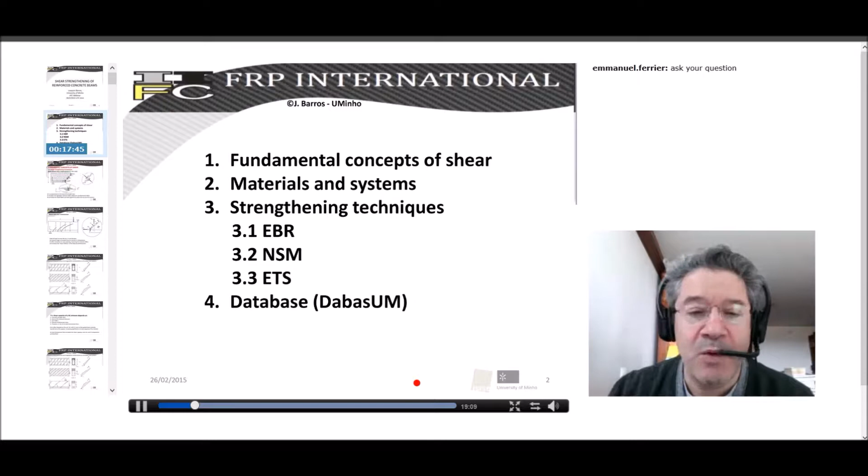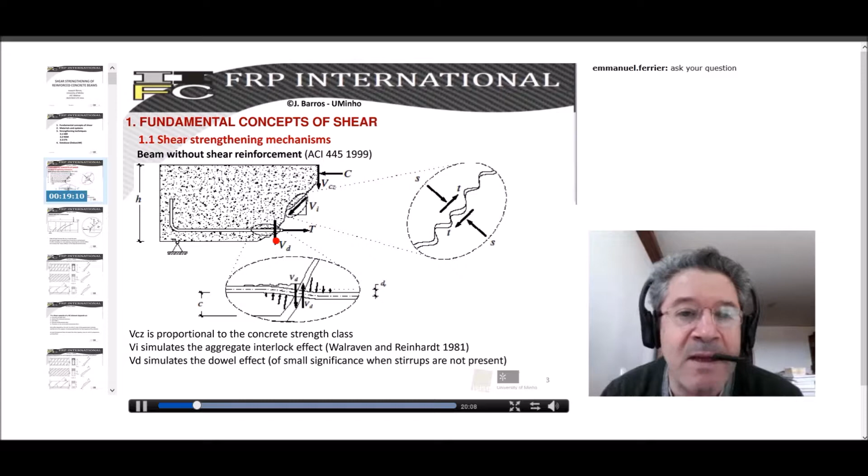Going directly to the first topic, dedicated to the fundamental concept of shear: when we have a reinforced concrete beam that fails in shear, three types of mechanisms are mobilized. This one, which I designate VCZ, is proportional to the concrete strength class - this part corresponds to the uncracked zone of the concrete. The other one is VI, that simulates the aggregate interlock effect. And finally, the third one corresponds to the simulation of the Dowel effect, or the contribution of the longitudinal bars for the shear strengthening.

When we have the stirrups represented here, in fact the stirrups have beneficial effects in all the previous terms, because, for instance, in the case of the favorable effect for VCZ, when we have these stirrups, we have a larger uncracked concrete zone, and consequently a higher contribution of uncracked concrete for the shear strength.

The stirrups also have a beneficial effect for the aggregate interlock contribution. Why? Because the stirrups crossing the diagonal cracks limit the crack width and crack sliding, so the aggregate interlock is more effectively activated. Finally, since the stirrups embrace the longitudinal reinforcement, they increase the shear stiffness of this flexural reinforcement, promoting or increasing the dowel effect. So the stirrups have these benefits in all three terms I explained before.

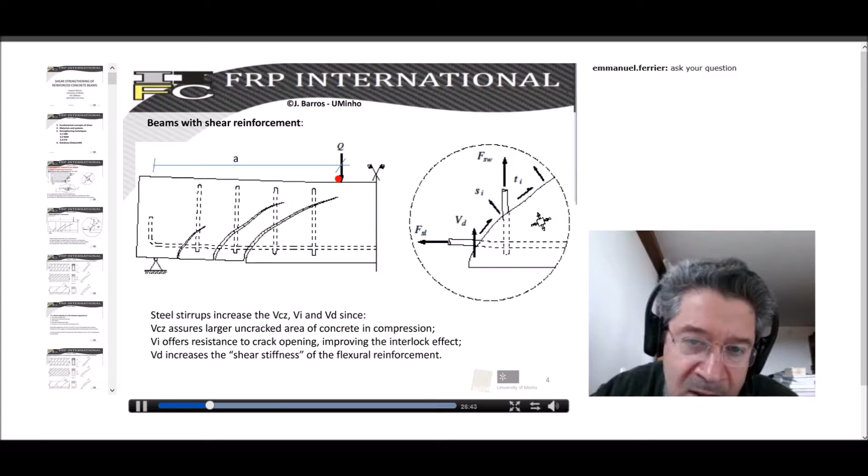When the ratio A divided by D is lower than 2.5, part of the load can be conducted directly to the support, giving a much higher load carrying capacity due to this arch effect. The shear capacity also depends on the flexural reinforcement ratio, due to the dowel effect, and it also changes the profile of the crack opening evolution of the shear crack. It also depends on the axial compressive force, because an axial compressive force contributes to a larger area of uncracked concrete and a smaller crack width, which enhances the aggregate interlock effect.

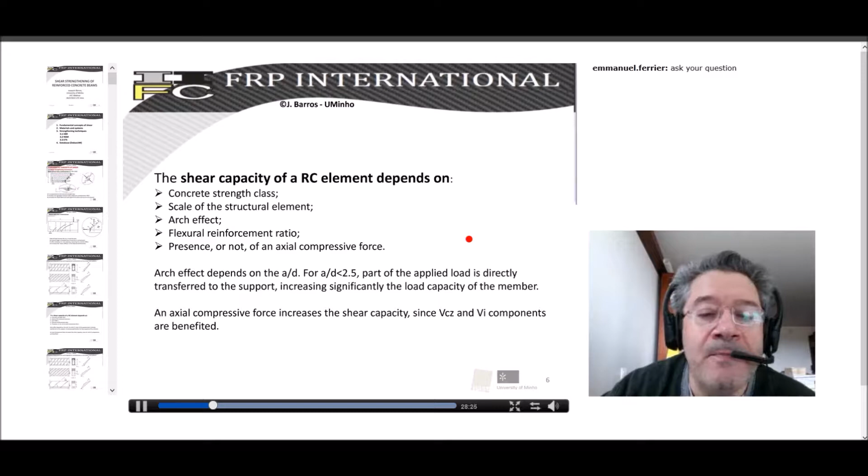So now, the idea is to present the fundamental concepts that are supporting the analytical formulations we will use to estimate the contribution of the FRP. But we need to start by understanding the fundamentals of the analytical formulation.

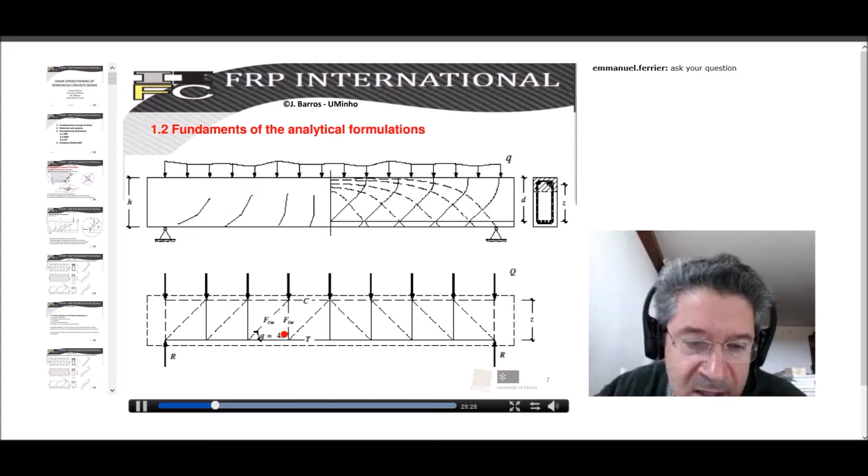So when we have the beam supported by a certain distributed load, in fact what we have are the isostatic compressive forces. We have the compressive struts, and we have the tensile ties, and these tensile ties need to be supported by the stirrups. This is what we are doing: we are introducing the stirrups in order to support these tensile forces.

If we have a representation of the forces formed when a beam is subjected to shear forces, we have a compressive force in the top part of the beam, the tension supported by the longitudinal bars, a diagonal compressive strut, and a diagonal tensile tie.

From equilibrium, the shear force designated by V is the vertical projection. The shear force is supported by the tensile force in the stirrup projected to the vertical direction. This is the force installed in the stirrup, and this is the inclination of the stirrup, and when projected to the vertical, it should be in equilibrium with the vertical force.

The force supported by the stirrup, if for instance the stirrup has two legs as is normal, we need to take into account that here we have 2 times the cross-section area of the vertical elements. The force supported is the number of stirrups that we have along this length.

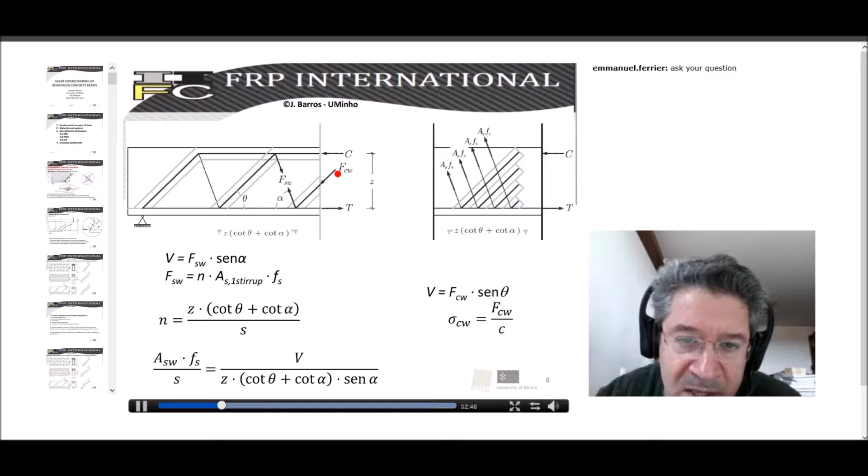And finally, we need to verify that we do not have crushing in the concrete compressive strut. Otherwise, we can have a very brittle failure mode.

Now, if we want to increase the shear capacity of a reinforced concrete beam by installing FRP systems, we can have a contribution designated by VF. So the total resisting force is the contribution of the concrete plus the contribution of the existing steel stirrups, now adding a term that is the contribution of the FRP.

The contribution of this FRP - in this case, I'm representing it as having a U configuration, and I'm assuming that the thickness of the FRP is designated by TF. We can have this FRP distributed continuously along the lateral faces and bottom faces in the case of using a U configuration.

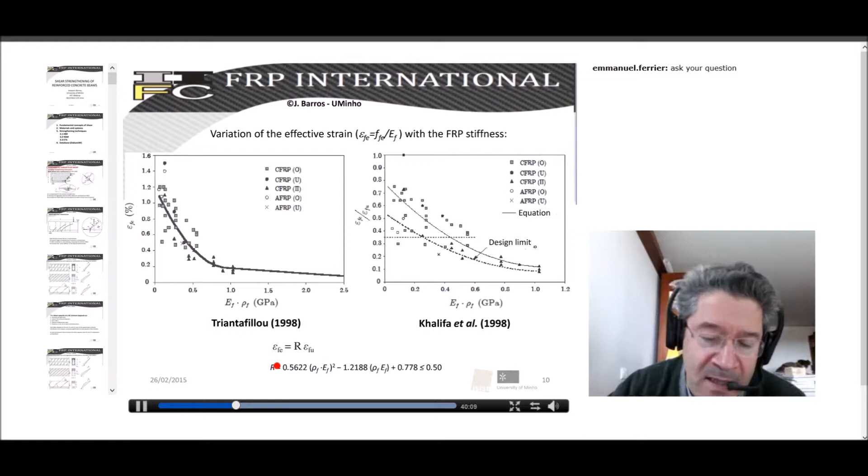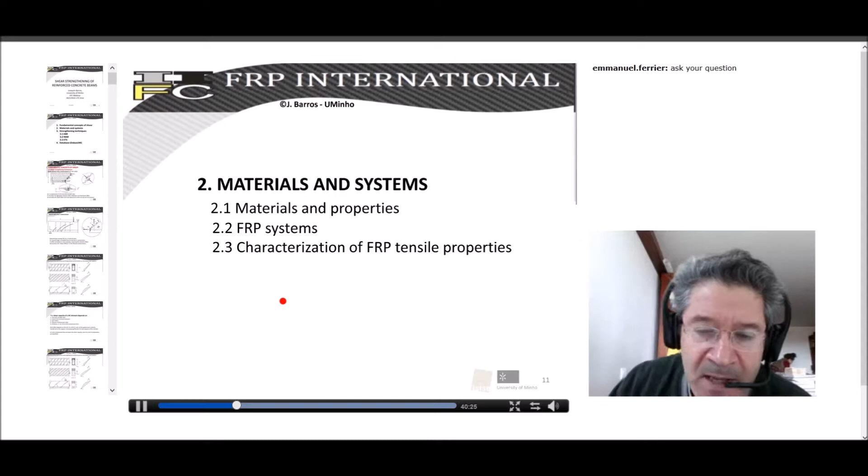Now I have a short presentation about materials and systems used for shear strengthening, but I will not spend too much time on this topic because, as I mentioned, in previous webinars my colleagues already talked about this. This is the relationship between stress and strain for several types of materials.

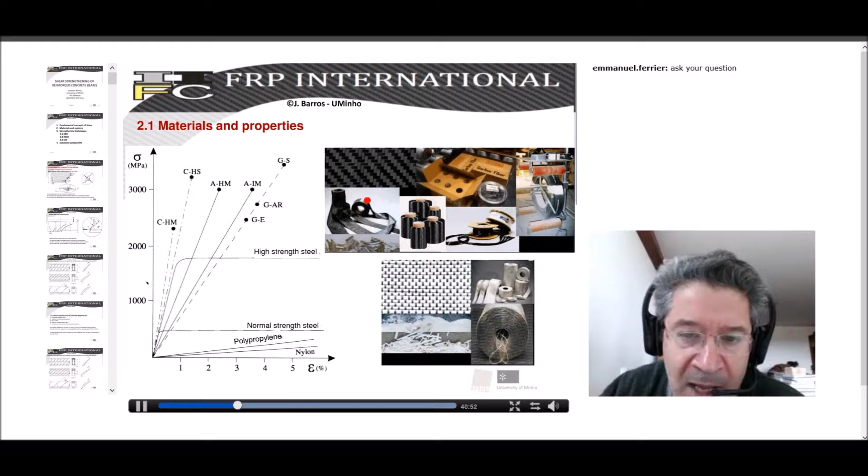In case of shear strengthening, we are mainly using carbon fibers, using wet layup systems or laminates.

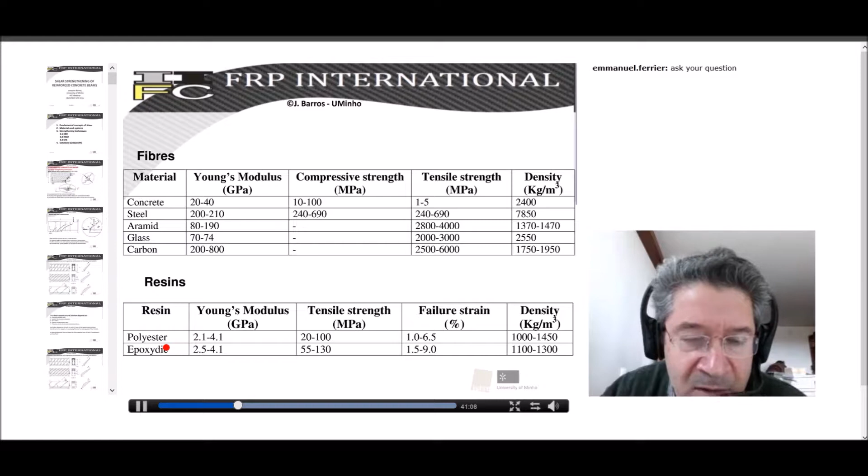We generally use epoxy resins to bond the CFRP systems to the concrete substrate, and the properties are indicated in these tables.

I will not spend time on this since you know it quite well. In terms of FRP systems, we have prefabricated bars and laminates, using an adhesive system to glue or fix the FRP bars or laminates to the concrete substrate.

Or we can use a wet layup system formed by a sheet or tissue, also fixed or bonded to the concrete substrate by an epoxy system.

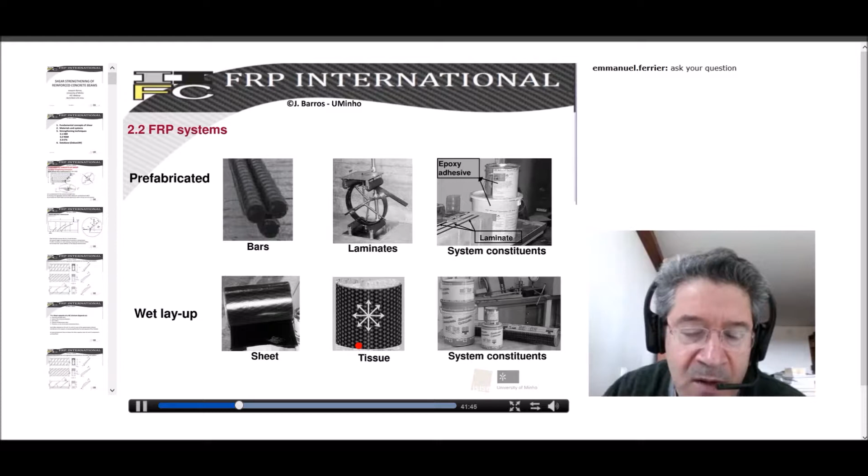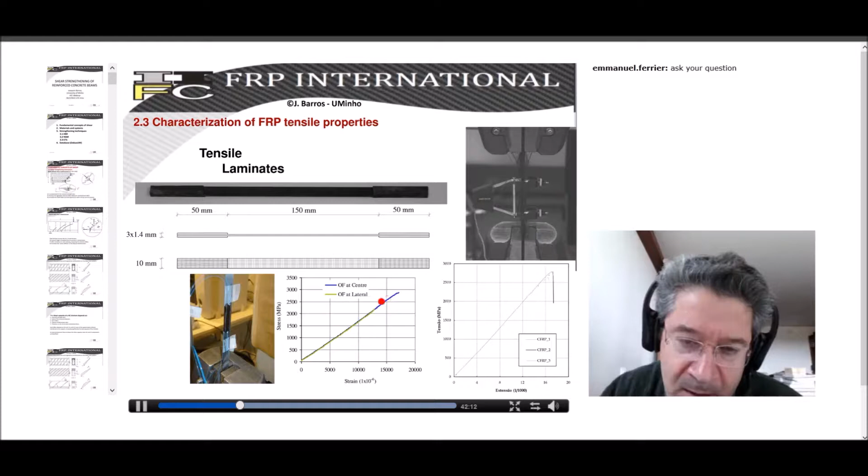To characterize these materials, we executed some coupons of laminates or wet layup systems and performed tensile tests to obtain the stress-strain relationship, which presents a linear elastic diagram and then fails abruptly.

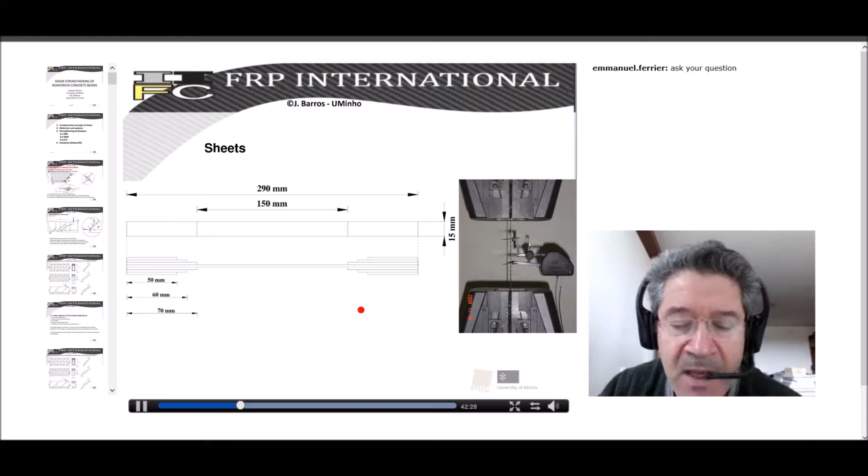This is the type of coupon we produce to characterize the tensile behavior of the wet layup systems.

It is also important to characterize the properties of the adhesives, mainly when we want to model the nonlinear behavior of reinforced concrete beams strengthened with CFRP systems.

In terms of strengthening techniques, as I will analyze in this lesson, I'm focusing mainly on three techniques: the EBR, the NSM, and the ETS.

In the EBR technique, I will present the shear strengthening configurations most used in this technique, as well as the shear strengthening effectiveness based on experimental evidence.

And finally, I will present the design formulations according to FIB, the European approach, the American approach ACI, the Italian design guideline, and the Australian design guideline.

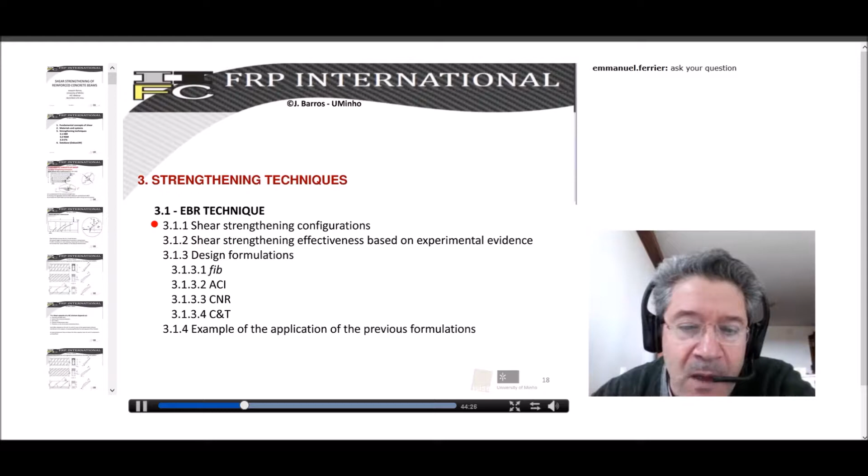This is some photos and schematic representations of the EBR shear strengthening solutions. This is a U configuration, and in this case we are also using an anchorage system.

In this case, we are using strips of wet layup systems to increase the shear strengthening of this beam. This is a special L laminate

that recently are being used also to increase the shear capacity of the beams. This is a special configuration of the EBR systems where it is executed some holes in the slab that is supported on the beam, and so in these holes it is made the anchorage of these shear strengthening systems.

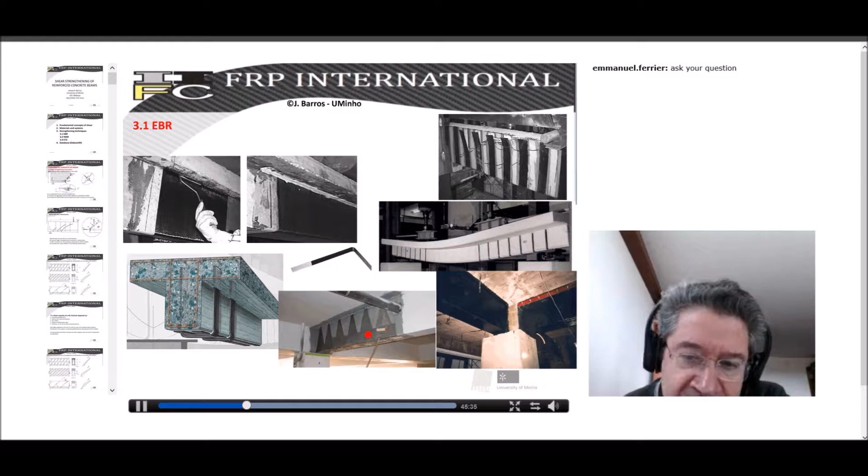The most common EBR strengthening configurations are those represented here. So this is a full wrapping, but I use the symbol O to indicate that it is a full wrapping shear strengthening configuration. We have also a U configuration where the FRP systems are bonded on lateral surfaces, but also in the bottom surface of the cross section.

We have also the S, that is sided. The FRP are installed only in the lateral surfaces of the cross section, and sometimes we use anchorage devices to try to avoid the premature detachment of the extremities of this U and side configuration. So I use a plus sign to designate that we are using in this case some anchorage devices.

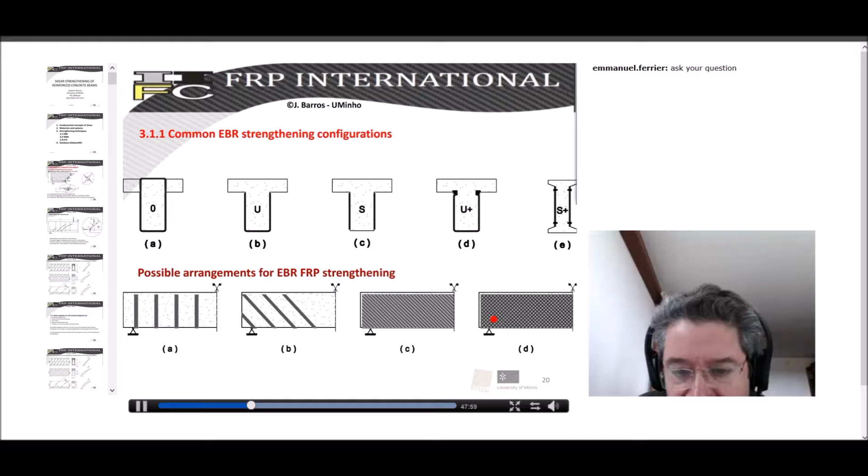I'm presenting here now some experimental results in order to show important aspects in terms of the effectiveness of different shear strengthening configurations. For instance, in this case, this was a study carried out by Professor Khalifa, where we have the reference beam, C-BT1, the C-BT2.

We have one layer of U configuration, and where the fibers are vertical. The fibers are in the vertical direction. The C-BT3, it was installed with 2 layers. So we have a vertical layer, with the fibers oriented in the vertical, 90 degrees, so in the vertical.

But we have also another layer in the horizontal, so it's 0 degrees, okay? 2 layers in this case.

In the C-BT4 and in C-BT5, in case of C-BT4, we are using strips of wet layup system, where each strip has a width of 50 millimeters, and the distance between the strips is 125 millimeters. While in this case, the same strips, with same width and same spacing, are installed, but installed only on the lateral faces.

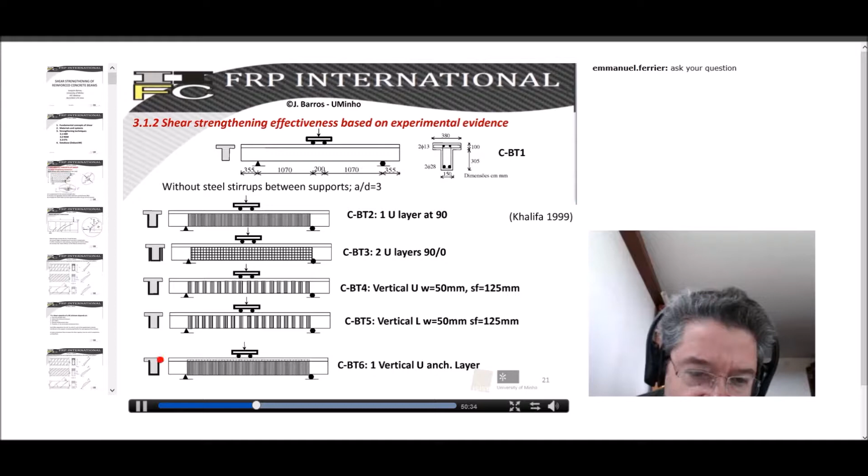In this case, in C-BT4, we are using U configuration, while in C-BT5, we are using L configuration. And finally, in C-BT6, we are using a vertical layer, a U configuration with the fibers in the vertical direction, but we are installing in the top part of the U configuration an anchorage mechanism, anchorage device.

We have here the relationship between the applied load and the mid-span deflection. The first aspect, and it's quite clear, is that when we compare the force-deflection relationship obtained in the reference, we don't have any type of shear strengthening reinforcement, or shear strengthening system. So this is the maximum load.

For the other cases, for the other types of beams, we realize that we obtain a significant increase in terms of ultimate load. So the increase is between 35% and 145%.

A very important aspect is comparing the beam where we have 2 layers in U configuration, where one of the layers has the fibers at horizontal direction, 0 degrees, to the response of the same beam but where we only applied 1 layer in vertical, not applying a horizontal layer. We realize that the values are almost the same. So the layer at horizontal direction has a very small contribution for the shear capacity of the beam.

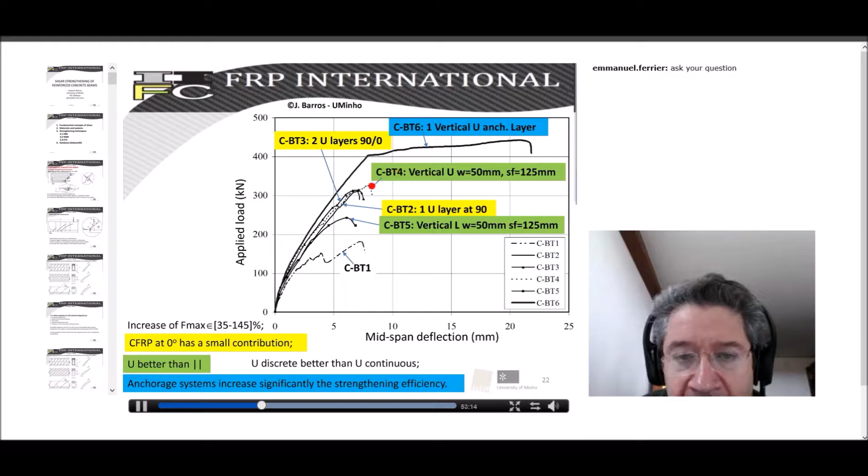Another aspect is when we compare the beam that has vertical strips of wet layup system, formed by strips of 50 millimeters width and spaced at 125, to the one composed by the same type of strips but placed laterally on lateral surfaces, we realize that the U configuration is much more effective in terms of shear strengthening than the one where we applied the FRP systems only in lateral faces. So this is a very important aspect.

Finally, we realize that when we introduce anchorage mechanisms, we increase significantly the capacity, and in this case, it was possible to transform the shear failure mode into a flexural failure mode.

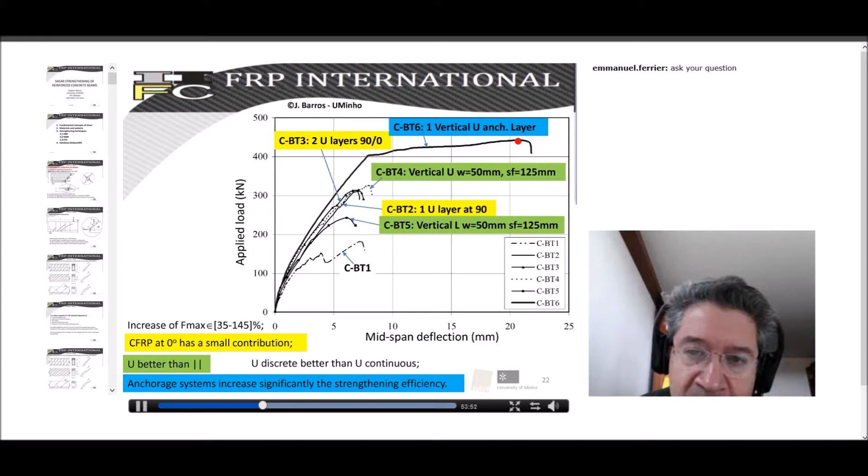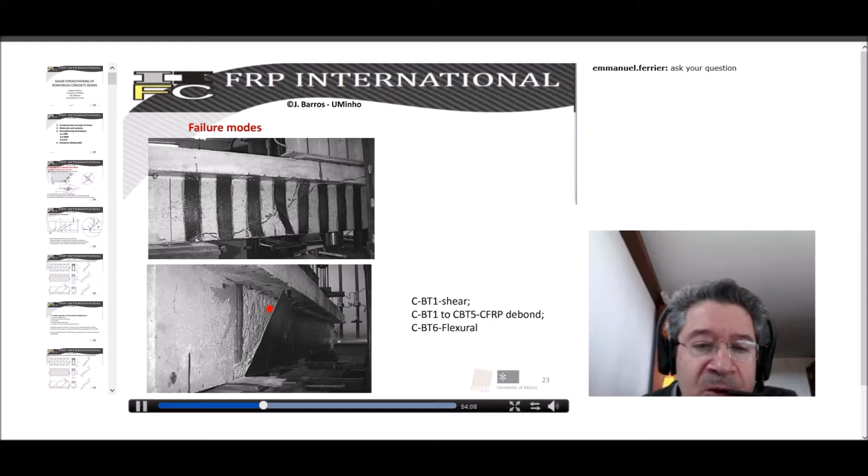Well, now this is the typical failure mode. So we have debond in case of a continuous system formed by wet layup system. And in this case, we have also the rupture of the CFRP and debond.

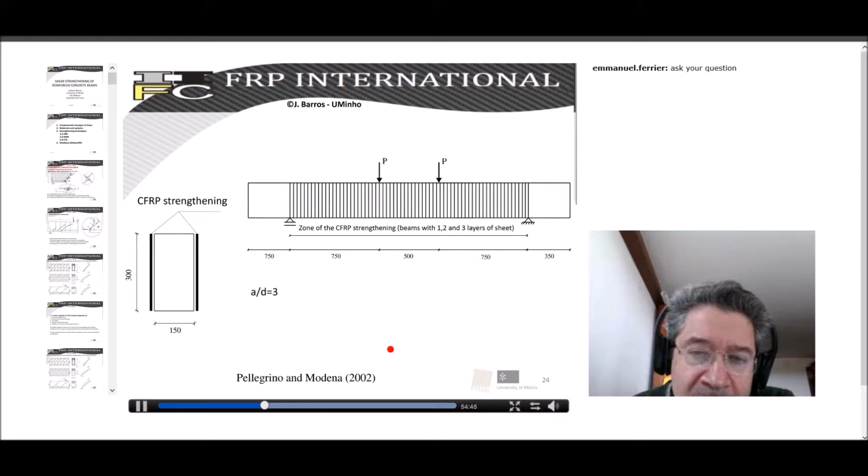In another work done by Professor Pellegrino and Professor Modena, they executed an extensive program, but I will focus on only one important aspect: the influence of the existing steel stirrups. For instance, in this beam, 3 layers of CFRP were applied, installed on the lateral faces. But in this case, the beam does not have stirrups, so the existing shear reinforcement ratio is 0.

So this beam has no stirrups. And when we apply the 3 CFRP layers, we obtain an increase of the shear strength capacity for the beam of 51%. For the same beam, with the difference of having a certain percentage of 0.33% in terms of existing shear reinforcement ratio, assured by steel stirrups, we realize that the increase provided by the same shear strengthening arrangement was only 32%.

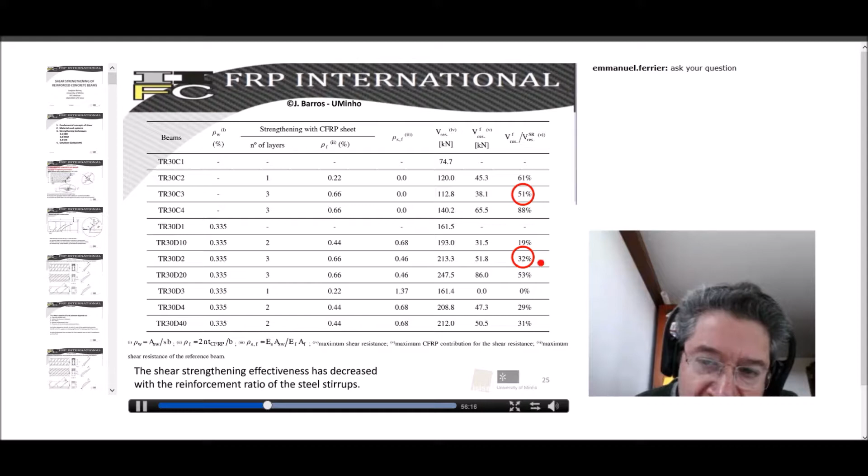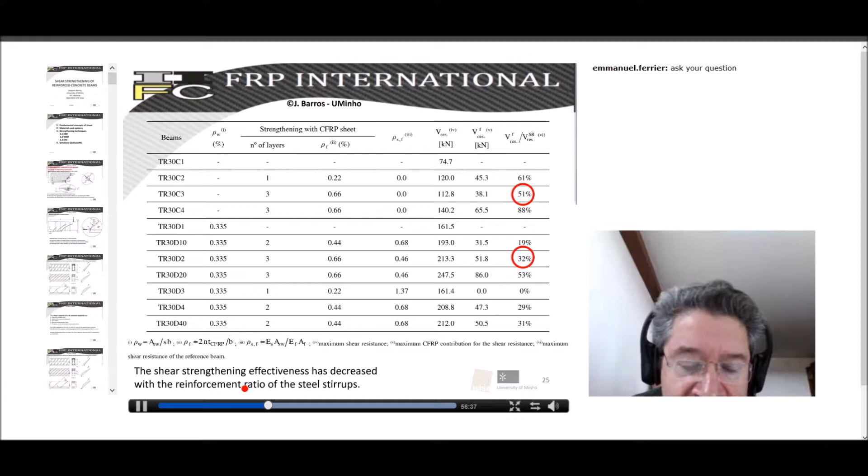So this is also observed in all experimental research being carried out by several people: the shear strengthening effectiveness decreases with the increase of the reinforcement ratio assured by steel stirrups.

Now, how to evaluate or estimate the contribution of the FRP systems for the shear strengthening of reinforced concrete beams. We assume this approach: the shear resistance of reinforced concrete beams is the additive contribution provided by the concrete, VC, plus the steel stirrups, plus the contribution of the FRP.

In general, all of them are based on the requirement to estimate the effective tensile strain in the FRP, or the tensile stress in the FRP, which depends on the effective tensile strain.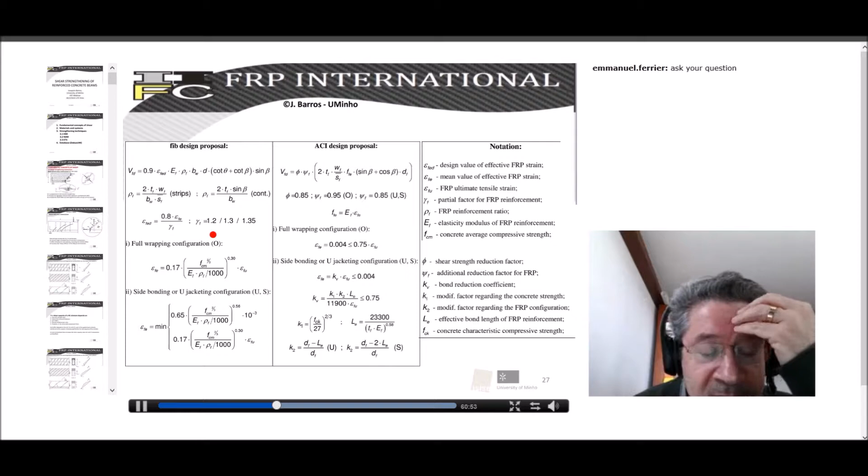Finally, FIB recommends a safety factor of 1.2, 1.3, or 1.35, depending on the quality control assured when applying these shear strengthening systems in real practice. We need to distinguish two situations: one is when we use a full wrapping configuration, involving the entire cross section. In this case, FIB proposes an equation that depends on the average compressive strength of the concrete and the stiffness of the FRP system.

While when we use a U or side strengthening configuration, the effective value, the effective strain, is the minimum of the values provided by these two equations. So we need to evaluate both equations, and the minimum one is used to evaluate the effective strain. After we evaluate the effective strain, we replace it here, divide by the safety factor, and finally we have the design value to estimate the contribution of the FRP system for the shear strength according to the FIB.

In case of the American Concrete Institute, this is the equation proposed to evaluate the contribution of the FRP system. It is recommended for the phi factor a value of 0.85, and for the psi f factor, 0.95 if we adopt a full wrapping configuration, or 0.85 in case of U or side configuration. To estimate the effective stress in the FRP, we need to evaluate the effective strain, because the effective stress is the product of the elastic modulus of the FRP by the effective strain.

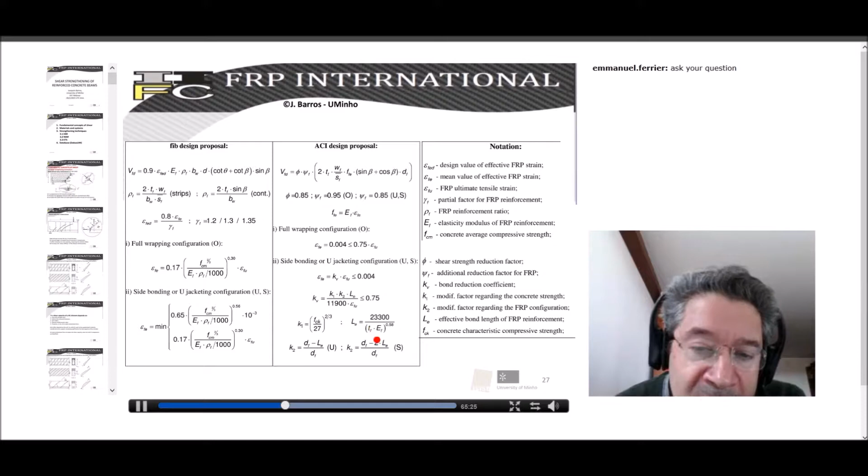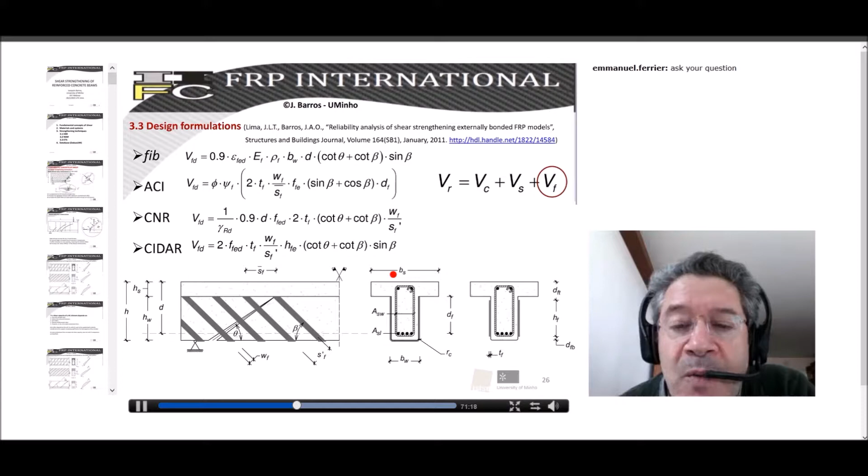In case of CIDAR, the Australian Design Guideline, the equation to obtain the contribution of the FRP is the one proposed here, where we have geometric parameters that depend on this figure, which is used to evaluate these geometric parameters: HFE, ZB, and ZT.

To evaluate the design value of the effective tensile stress, CIDAR proposes two parameters. The first, DF, is a stress distribution factor, evaluated by different equations according to the type of shear strengthening configuration adopted. The second is the maximum design value of the tensile stress installed in the FRP.

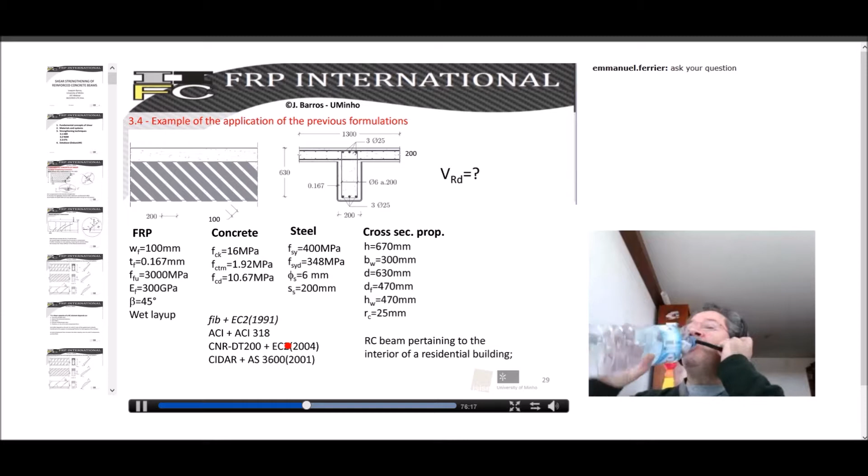Imagine that we have a reinforced concrete beam with this geometry, with a width of 200 and a total depth of 630. This is the longitudinal reinforcement in the bottom and in the top, and it also has steel stirrups.

The idea is to estimate the shear capacity of the beam when we install strips of CFRP with a width of 100 millimeters, as indicated here.

The thickness of the FRP is 0.167 millimeter. The ultimate tensile stress is 3000 megapascal. The Young's modulus is 300 gigapascal. The inclination of the FRP is 45 degrees, and we are using a wet layup.

We assume that the concrete of this beam has a characteristic compressive strength of 16 megapascal, an average tensile strength of about 1.9 megapascal. The design value of the compressive strength is 10.7 megapascal. In case of steel, the yield stress is 400 megapascal, and the design value of the yield stress is 348 megapascal. The diameter of the steel stirrups is 6 millimeter, and the distance between the steel stirrups is 200 millimeter.

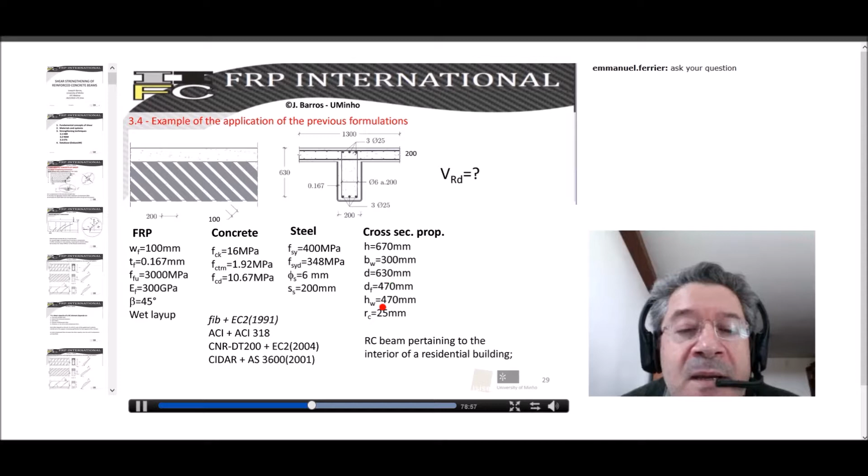This is the geometric properties of the cross section. The total depth is 670 millimeter. The total depth of the FRP, that is from the bottom surface of the flange to the axis, DF is 470 millimeter. The BW, oh this is a mistake, the BW is 200 instead of 300. The D is the distance from top up to the longitudinal reinforcement, 630. And the radius when we round the corner in order to avoid stress concentration, the RC is 25 millimeter.

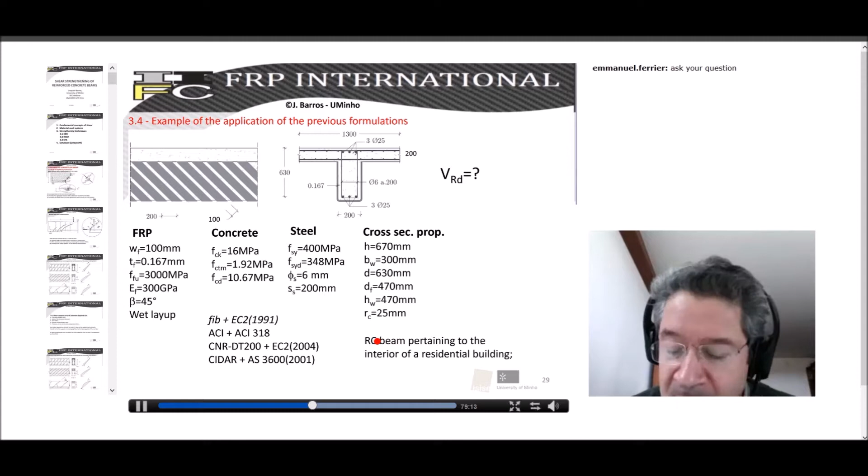We assume that this beam pertains to the interior of a residential building, and we are using a CFRP system. Now we will use the FIB approach to estimate the contribution of the FRP, plus the Eurocode approach from the edition of 1991. Nowadays we have a more recent one that we will use with CNR, because CNR is also a more recent approach. So the idea is to be coherent.

So when FIB was published, this formulation to evaluate the contribution of the FRP, the document available to estimate the contribution of concrete and steel stirrups was EC2 of 1991. And now we will start evaluating the shear strengthening ratio.

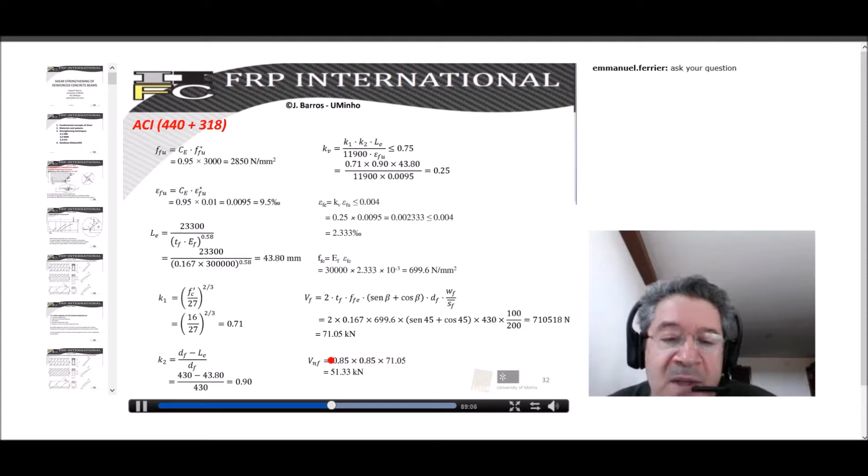Now we can use the ACI 318 to evaluate the contribution of the concrete and the contribution of the steel.

Finally, we obtain the shear capacity of the strengthened beam, which is the product of phi, which according to ACI is 0.85, multiplied by the contribution of the concrete, 84, the contribution of the steel stirrups, 71, and the contribution of the FRP, which should be multiplied by the psi f factor, that for U configuration is 0.85. Finally, we obtain the shear capacity according to this approach.

For the CNR approach, we need to start by evaluating the horizontal spacing between the FRP systems. Since the inclination is 45 degrees, we obtain 141 millimeters for the spacing between the strips of FRP.

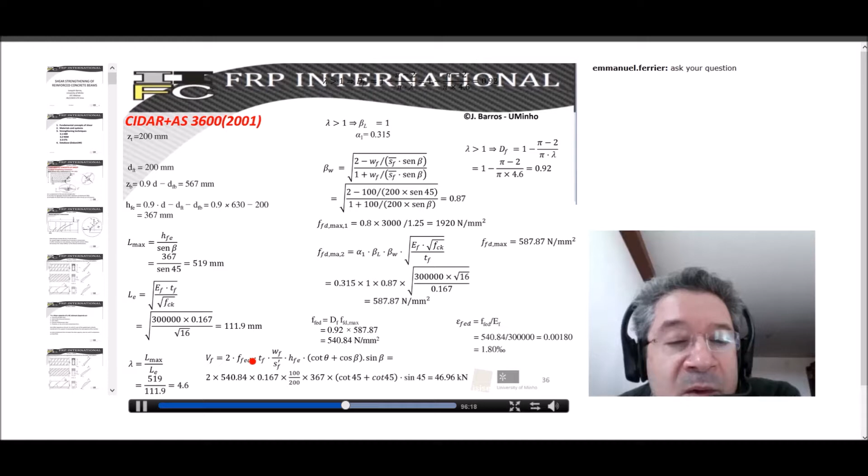We need to estimate the design value of the effective stress. The design value of the effective stress is the product of this stress distribution factor, DF, multiplied by the maximum value of the design effective stress, the maximum value of the design tensile stress in the FRP.

To evaluate the DF, we need to estimate the lambda parameter, which is the ratio between L max and LE, the effective bond length. This is how to evaluate L max, while LE, the bond length, depends on the axial stiffness and on the characteristic value of the compressive strength of the concrete. From these two values, we are able to obtain the lambda parameter.

Since the lambda parameter is higher than 1, this means that the beta L should be equal to 1, and alpha 1 should be 0.31, while the DF, the factor that takes into account the distribution of the stresses along the depth of the cross section, is estimated according to this equation. Then we obtain a value of 0.92 for the DF. This means that here we replace DF by 0.92.

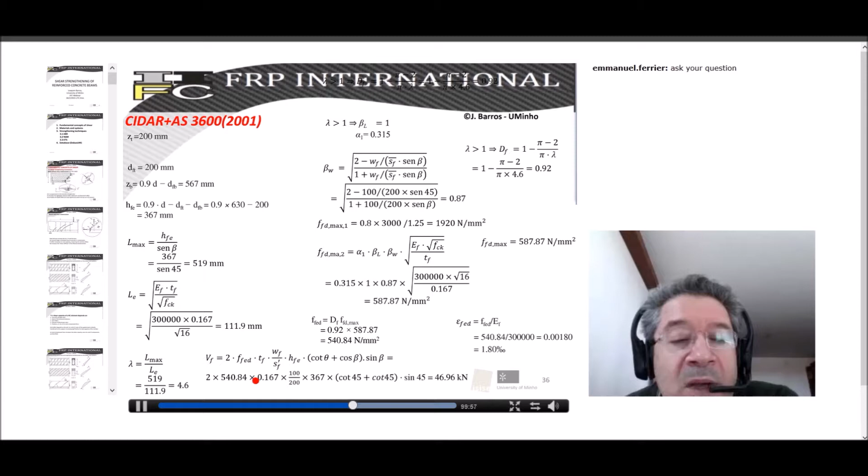Now we use this term, replace it, and obtain the contribution of the FRP, comparing according to the CIDAR, and considering the Australian design guideline to evaluate the contribution of the steel stirrups and the concrete. This equation evaluates the contribution of the concrete, while this one estimates the contribution of steel stirrups. Finally, we obtain the shear capacity of the beam, combining the contribution of concrete, steel stirrups, and the CFRP system.

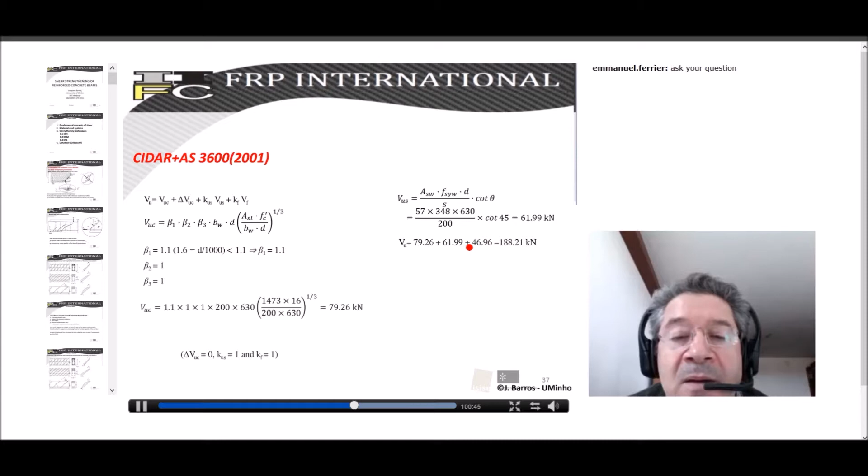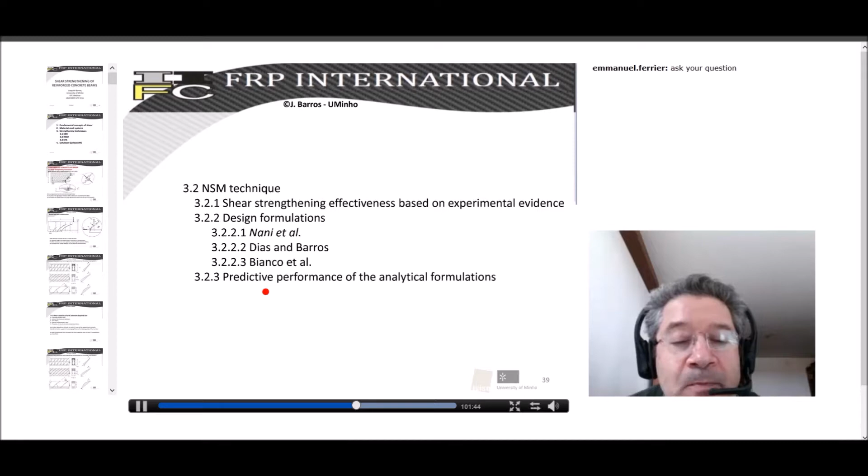For the NSM technique, the near surface mounted technique, what we use is applying the FRP systems in the lateral surfaces of the beam. So we need to open, or execute, slits in the lateral face, in the concrete cover of the lateral surface of the beams.

In this case we see several slits opened on the lateral face, so we need to clean them. Then we cut the laminates or FRP bars, and clean the FRP - in this case CFRP laminates. Then we fill the grooves with epoxy, applying a thin layer in the lateral face, insert the laminates, and finally remove the excess epoxy, finalizing the strengthening process using NSM.

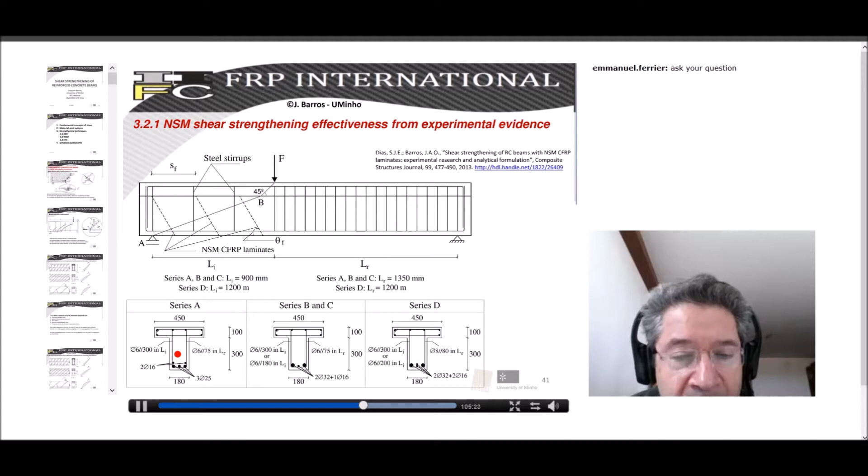Now let's look at what happened in terms of the influence of the compressive strength of concrete. In series C, we used a concrete of very low compressive strength, with an average value around 19 megapascal. In series B, we adopted a concrete of about 40 megapascal. And in series D, we used a concrete of about 60 megapascal.

In this graph, we have a relationship between the contribution of the CFRP system, which was composed of laminates. In this case, we used rectangular cross-section CFRP laminates with a cross-section area of 1.4 millimeters by 10 millimeters.

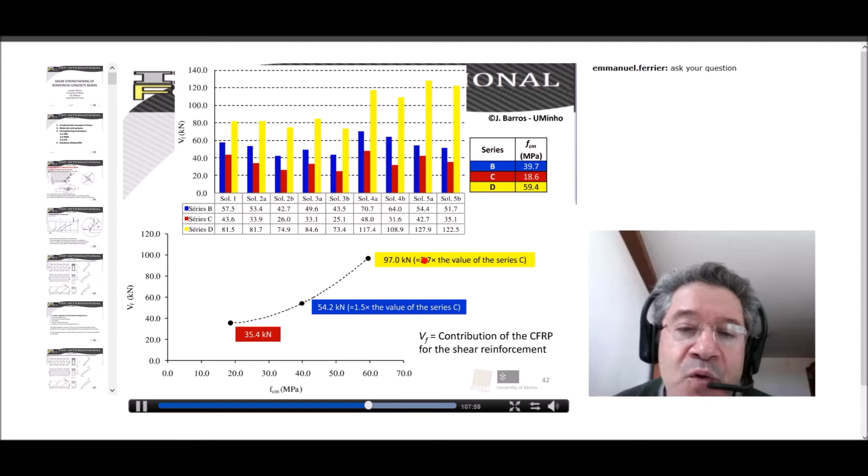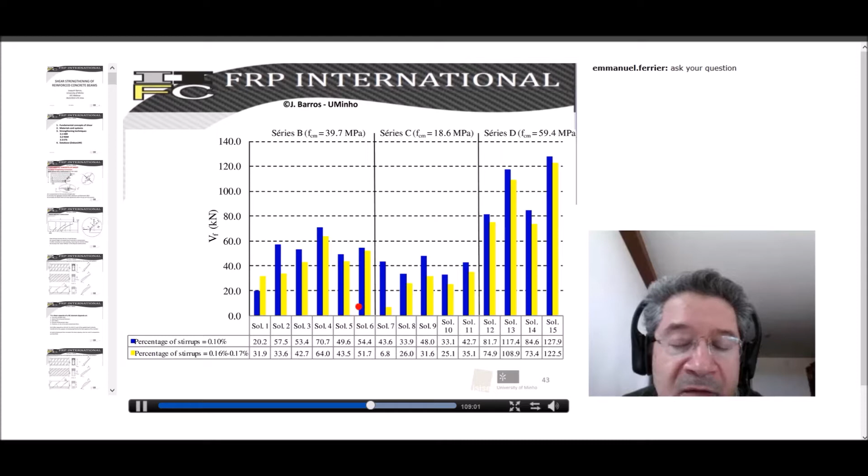Another very important conclusion we obtained from this series of tests is about the effect of the percentage of existing steel stirrups. At yellow color, we have the contribution of the CFRP beams when using the highest percentage of shear stirrups, between 0.16 and 0.17. In blue, the percentage was 0.10. From these graphs, it's clear that as higher the percentage of the existing steel stirrups, as lower is the effectiveness of the shear strengthening arrangements.

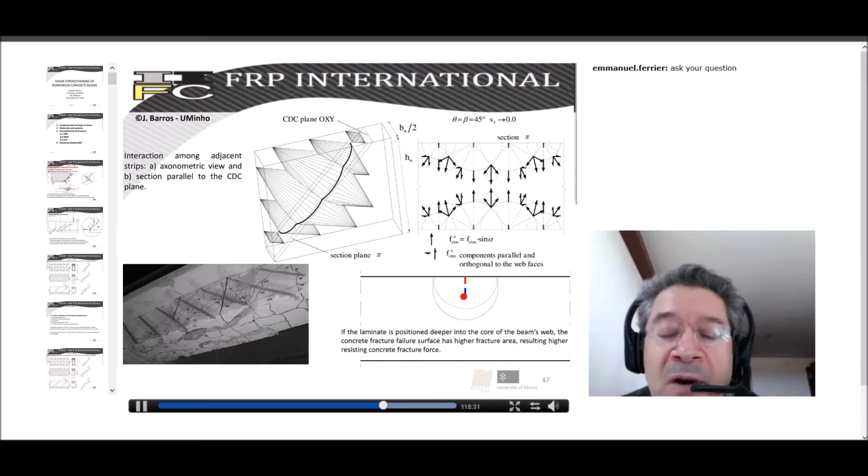Since the contribution of the NSM laminates also depends on the concrete fracture resistance, this means that if we install the laminate deeper in the slit, we have a larger concrete surface. And if we have a larger concrete surface, we will consequently have a larger contribution of the CFRP for the shear reinforcement. Then we executed some preliminary tests to verify this.

What we did was execute direct pull-out tests. This is the specimen, this is the bond zone. We analyzed three configurations for installation of the laminate: installed at the surface of the groove, at 6 millimeter depth in the groove, and finally at 12 millimeter.

Look at the results we obtained: clearly we have an indication that when we install the grooves deeper, where we install the laminate deeper in the groove, the maximum pull-out force increases. The blue corresponds to results when we install the laminate at the surface of the groove, and the green corresponds to installing the laminates deeper in the slit. So in fact, it's a good idea to install the laminates deeper in the groove. Of course, we are limited by the concrete cover thickness, but in general we have a concrete cover thickness that is 20, 25, or even 30 millimeters.

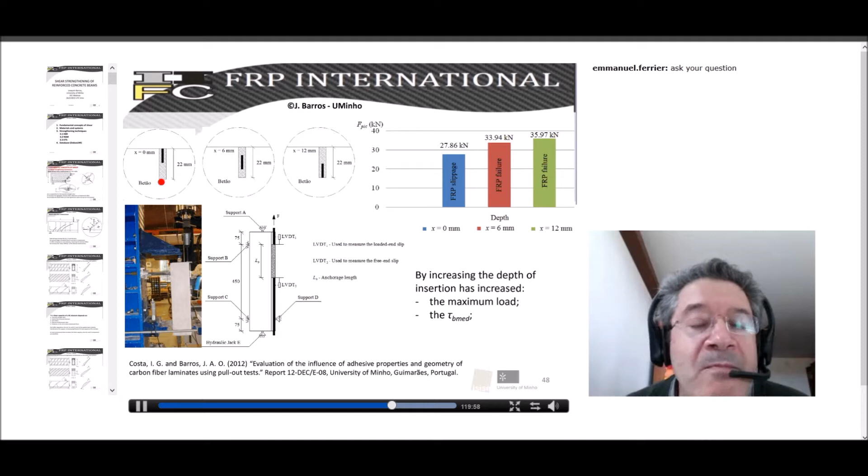In the second beam, the blue line, we install the same laminates but deeper, in the groove. But in order to avoid injuries in the longitudinal reinforcement, the grooves were only open from the top, above the longitudinal reinforcement. This is why the laminates indicated in blue color go from the top level of the longitudinal reinforcement up to the bottom surface of the flange. So the difference here is that we are installing the same laminates but deeper in the grooves.

In this beam, the green one, we are installing 4 laminates. For the beam in red color and the beam in blue color, we are using laminates of 1.4 by 20 cross section. While in the other 2 beams we are using 1.4 by 10 cross section. Why? Because in these 2 beams, the green beam and the gray beam, we are using not 4 laminates but 8 laminates.

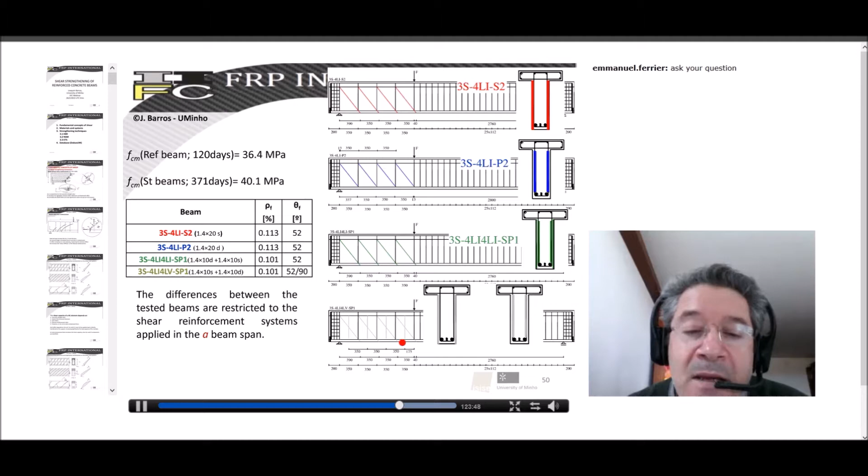And I only highlight the relevant aspects.

Look, for instance, if I'm comparing these two beams, this is the force deflection for all the beams, and if I'm comparing the shear strength contribution,

for the beam where we install the red beam, where we install 4 laminates but at the surface, we obtain a shear strength effectiveness of about 68%, while when I install the same laminates but deeper in the groove, I obtain a shear strength effectiveness of 81%.

So, in fact, we can conclude that if we have the possibility to install the laminates deeper in the cross section of the beam, we have a higher effectiveness for the FRP systems.

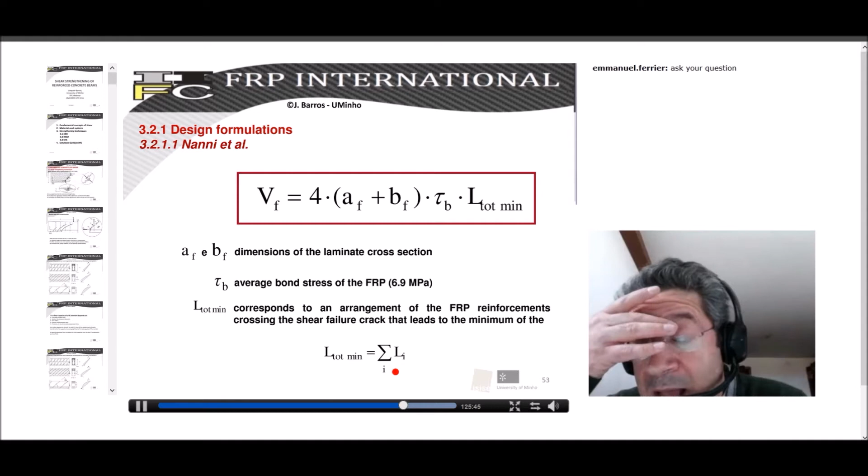Well, since it's about 2 hours of lesson, I will only present the formulation for the NSM, and then it will not be possible to continue, where I had the idea to talk about the shear strengthening technique, but it's not possible because I have another commitment at 3 o'clock.

So this is the equation or the formulation proposed by Professor Nanni and his co-authors to estimate the contribution of the NSM system.

Joaquim? Joaquim? Joaquim?

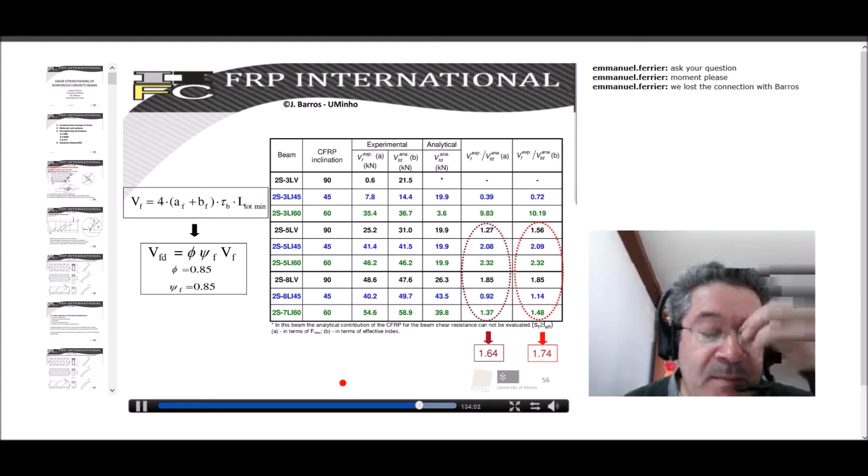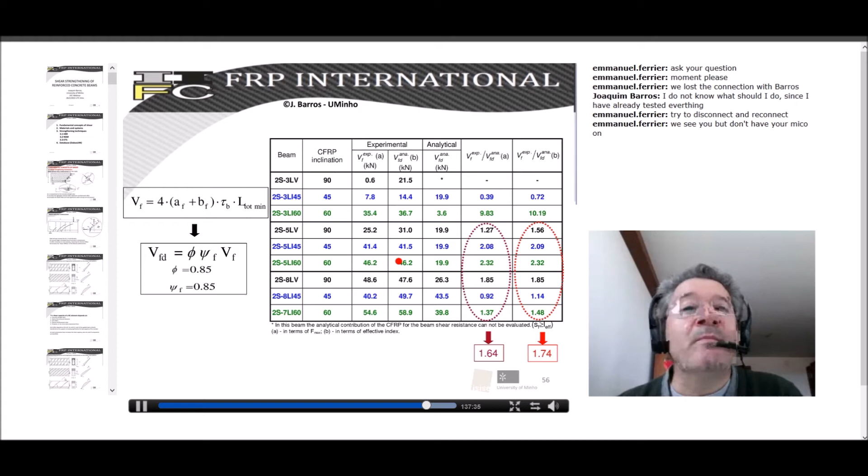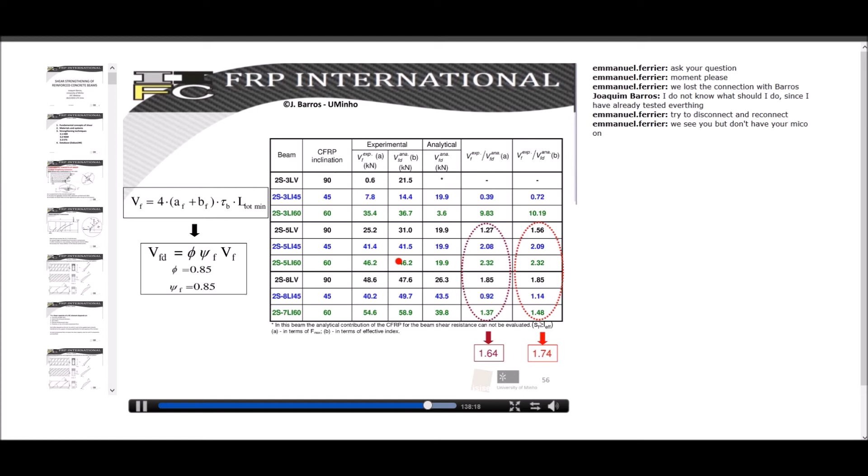Hello. So I don't know why we are not hearing. Joaquim, maybe something's wrong. So we'll try with Joaquim to reconnect to see if he can finish the presentation. Joaquim is here, but again, you don't have audio.

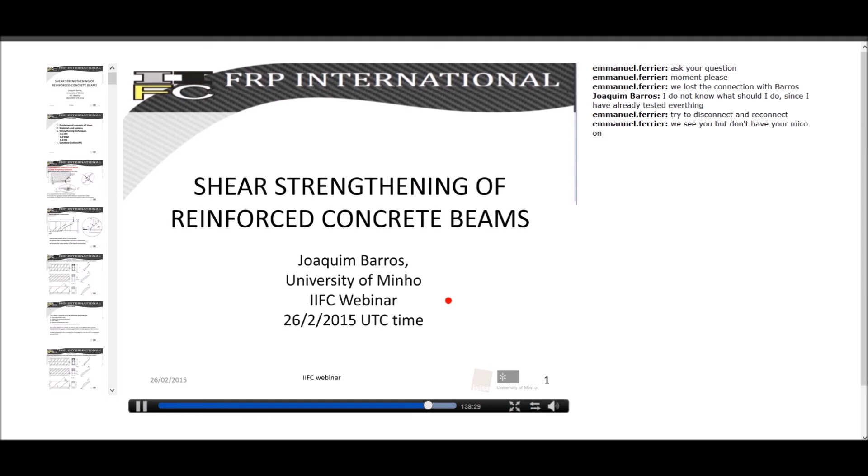Yes, okay, fine, we can hear you okay again. Your microphone is on. Okay, so I'm going directly to it. I'm almost finishing.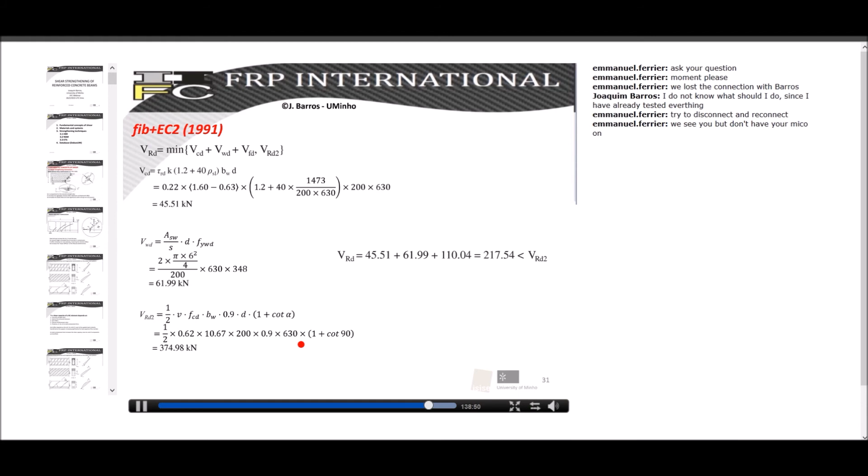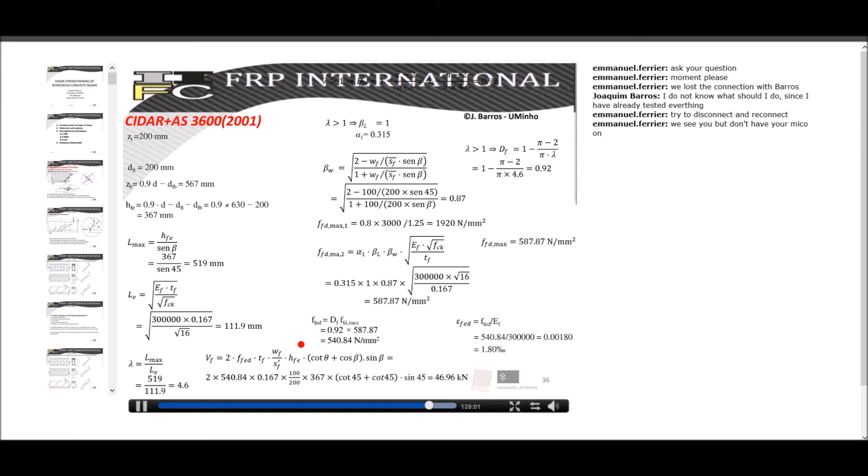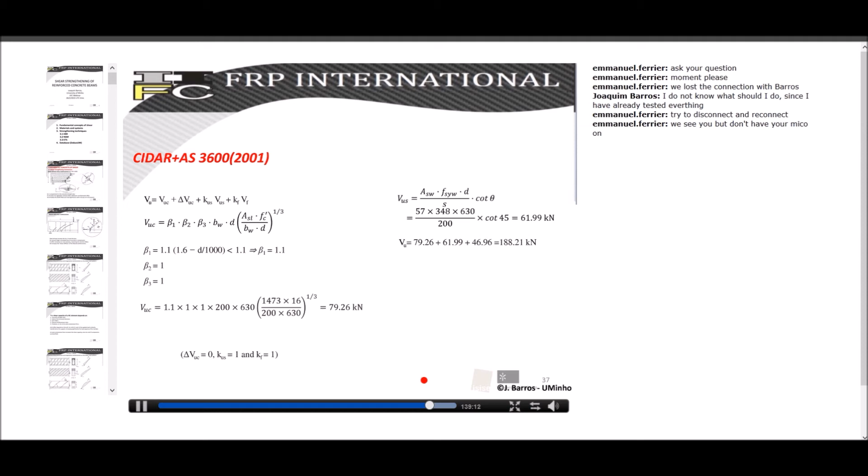Okay, so it was at 56, I was presenting the NSM formulation. Okay, a moment please. Okay, so I was explaining the Nanni et al. formulation, the formulation proposed by Professor Nanni and his co-workers.

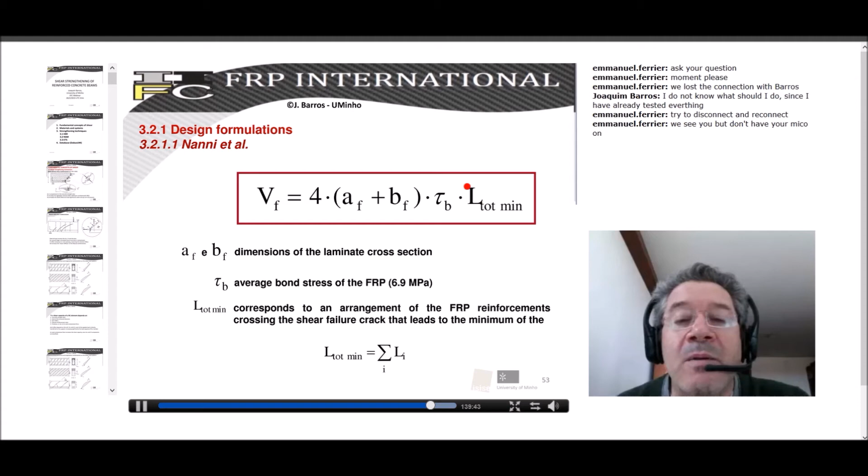So I explained how to evaluate the L tot min parameter according to this graphic representation. And well, we have also the equations that can estimate the number of laminates crossing the critical diagonal crack, that is this number.

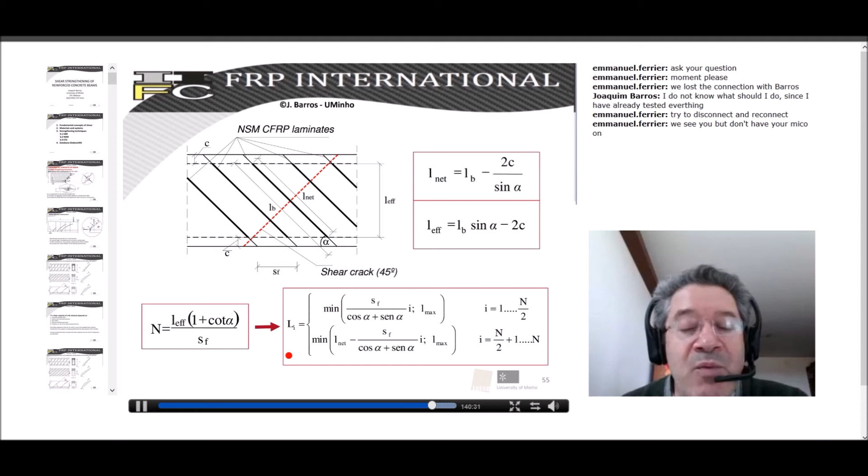And we have the equations to obtain the bond length for each laminate. So using this equation we can obtain L1, L2, L3, the bond length for each laminate, and consequently we are able to estimate the contribution of the NSM laminates for the shear strengthening of the beams.

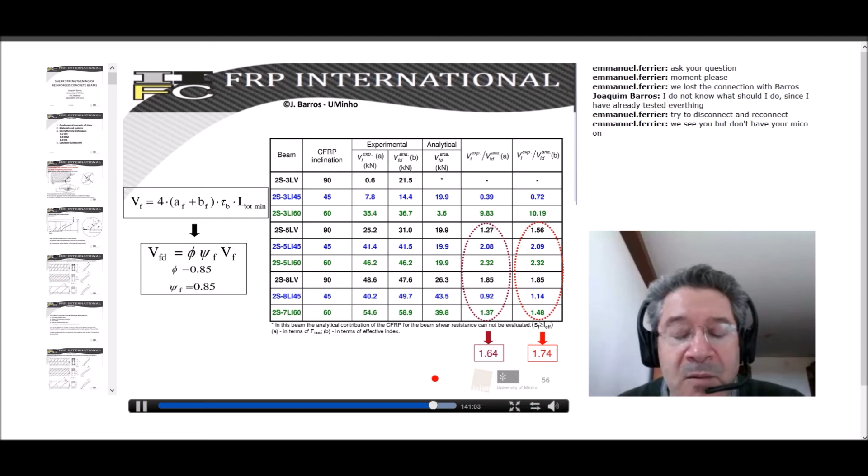And well, based on applying this model to beams that we tested, we obtain a ratio between the experimental and analytical that is around 1.6 and 1.7. That is acceptable, taking into account that we are handling quite brittle failure modes.

From the extensive data that we collected, we realized that effective strains decrease with the stiffness of the FRP, the percentage of existing steel stirrups, and also decrease when we are adopting a lower strength concrete class.

And based on this data, we proposed an equation that depends precisely on these parameters: the characteristics of the FRP, the characteristics of the shear reinforcement, the stirrups, the average concrete compressive strength, and the inclination theta f. Theta f is the inclination of the laminates.

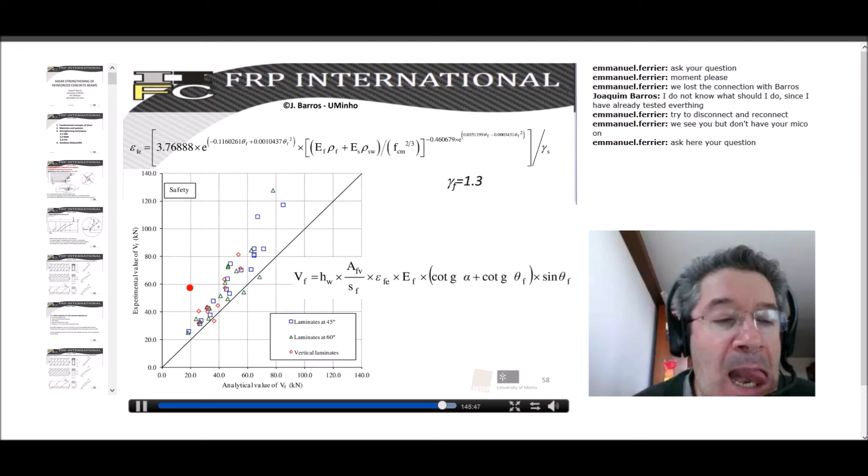0.2%, whatever is the FRP strengthening, meaning the Young's modulus or the steel ratio and so on. I think this approach is quite conservative, and it seems your slide shows that we could try to make this value higher. Do you know if in any other guideline, ACI, CSA, there is some evolution in this field to consider higher values of strain in FRP, if the Young's modulus is different, if we use glass fibers or other fibers?

Well, in fact, the available experimental research clearly indicates that the effective strain depends mainly on the compressive strength of the concrete, on the inclination of the shear, on the reinforcement ratio of the shear reinforcement, and also the shear strengthening ratio. This is clear and depends significantly also on the type of shear configuration adopted.

For instance, if we adopt a full wrapping configuration, the ultimate strain is much higher than the ultimate strain we can estimate for the U configuration and for the side configuration. This is obvious from the experimental evidence, and this is why it is fundamental to have equations that estimate or take into account this type of information. This is why we have an equation that, in my point of view, represents the most important aspects that limit the ultimate strain. So limiting the strain to one per mille is obviously too conservative in my point of view.

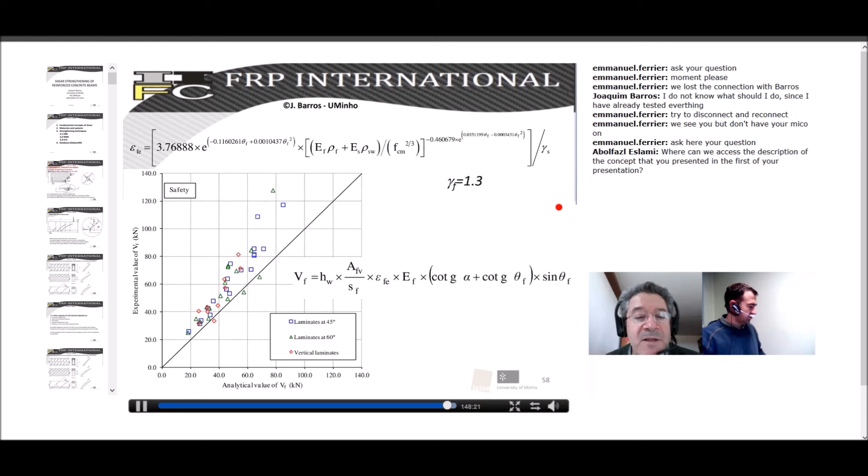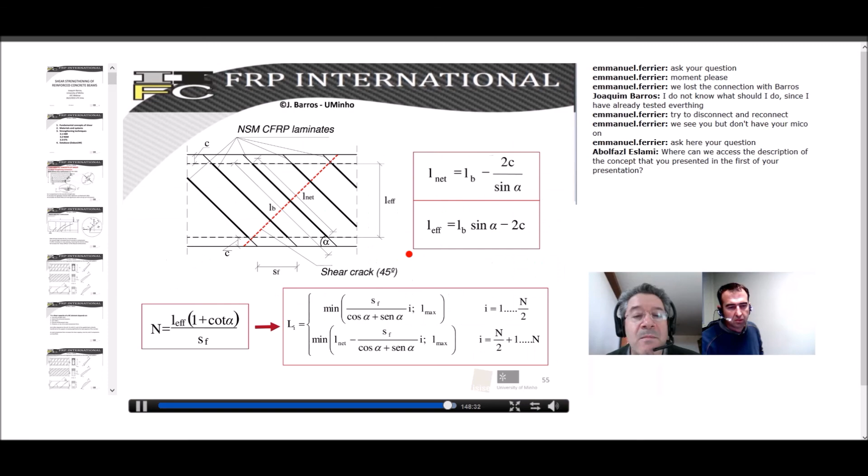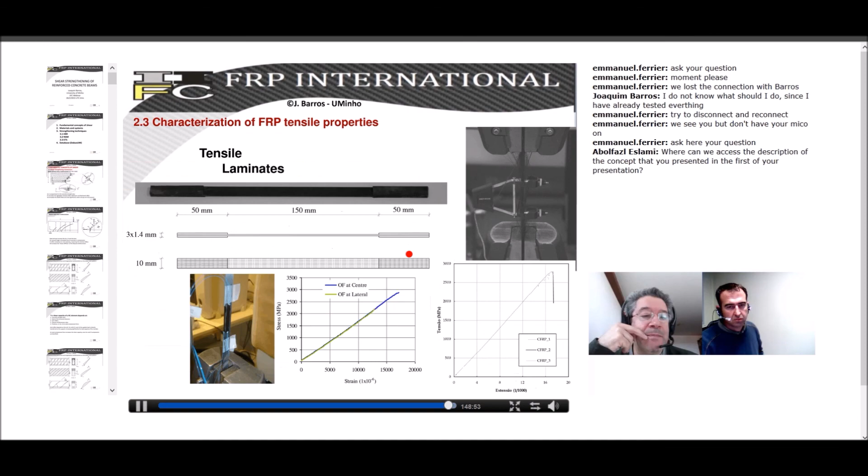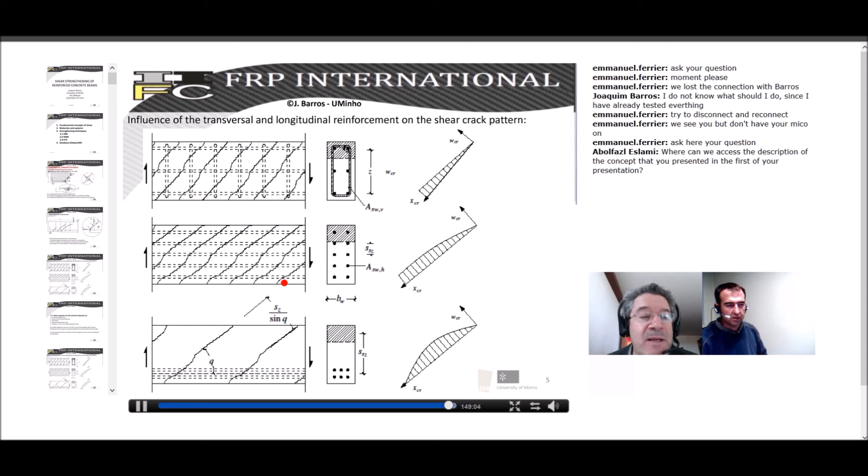Maybe I don't remember what was the first part, but maybe. Okay, the first part, I don't know if I can present the first slide. Can you tell me how I can go directly to the first slide? Well, how can I go directly? Because it's important to go to the second slide where we have the index. Yeah, I think we are nearby. It's around here, I don't know. Please go. Okay, okay, so almost.

Okay, so please, can you allow Abolfazl—I don't know if I'm pronouncing it correctly—but can you tell me what topic you want? Is it the fundamental concept of shear? Is it the strengthening techniques? Please be more precise.

Number one, fundamental concept of shear. Okay, so the fundamental concept of shear is available in a lot of books, because it's fundamental, basic knowledge about shear. But if you can send me an email, I can recommend some books, many books, where this type of information is clearly described. So if your main interest is getting information on the fundamental concepts of shear, I can recommend one or two books where this information is detailed.

Okay, thank you, Joaquim. So, well, if there are no other questions, what I propose is, send an email to get the details. Okay, so I will send to you, indicating the concept of shear of FRP strengthening. Okay, so I can also send you a document where we describe the concept or the phenomenology underlying FRP shear strengthening. Okay, I think that's perfect. Thanks a lot, Joaquim, maybe he can send you an email and get the information directly.